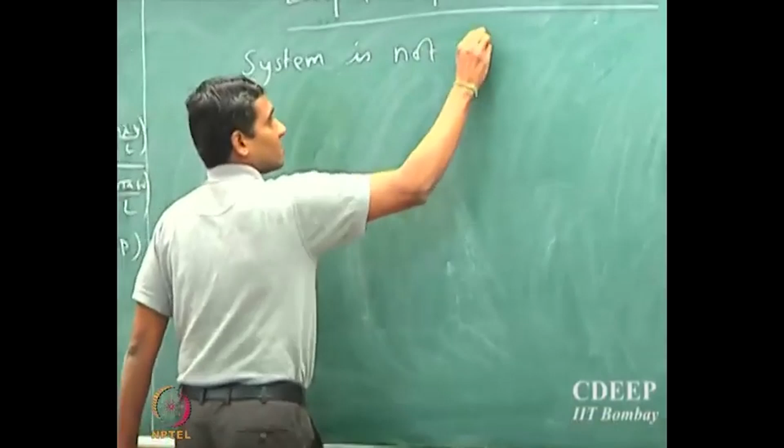This really translates into the question of how to capture the transient. What if the system is not maintained in a steady state? It's possible it's not maintained.

A very easy example is you take a cup of coffee, tea or milk or whatever and just leave it on the table. So there's really no steady state till the system reaches the same temperature as that of the surroundings. So really the steady state of a cup of coffee or chai kept on the table is the state at which every location or every particle in that cup actually reaches the temperature of the surroundings.

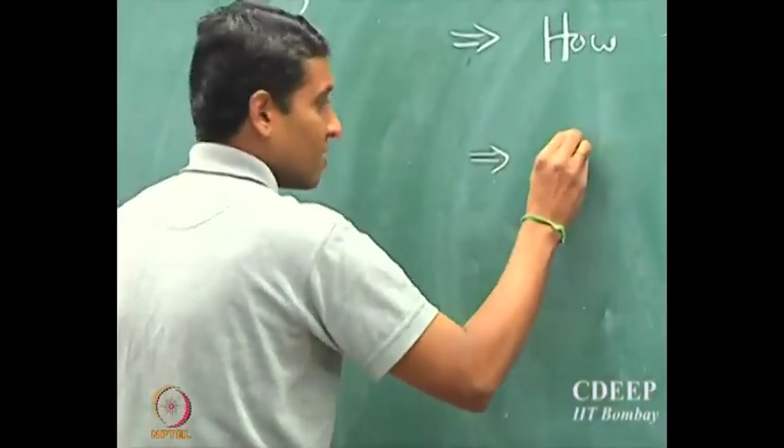Or the steady state really here means steady state is equilibrium with the surroundings.

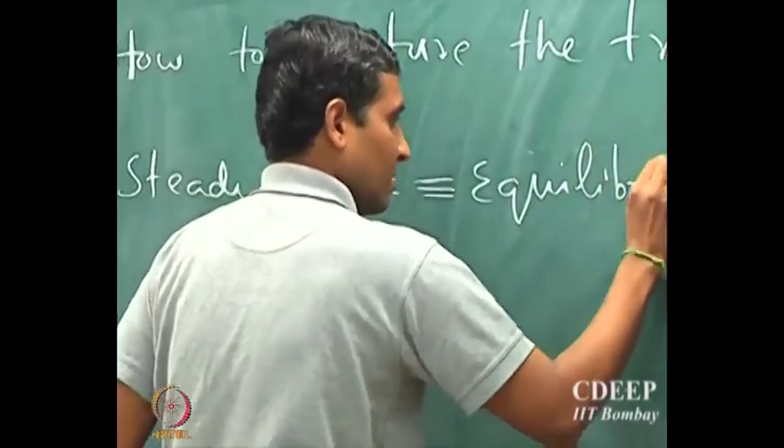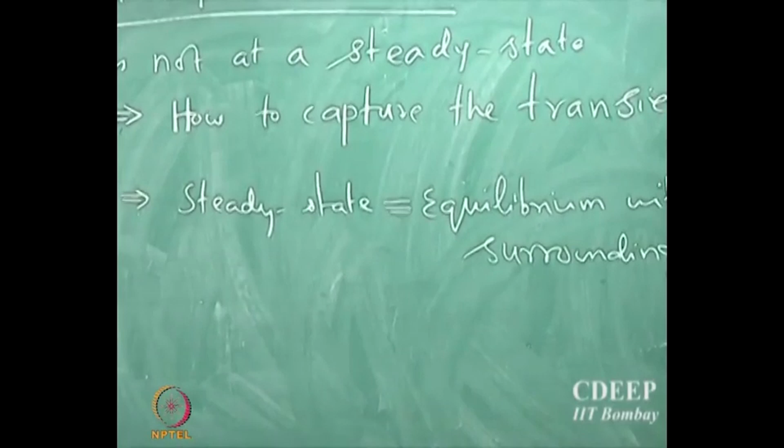So all the cases that we have seen, all the models that we have written so far, except for the general model that we wrote, they are all for systems where it has already reached an equilibrium with the surroundings. So the question is, that's not always true. There are systems where they may not be under equilibrium.

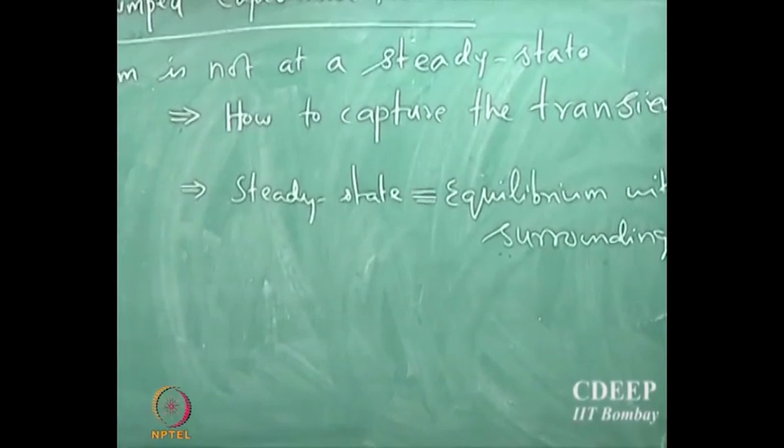So how do we characterize them? How do we quantify them? And what kind of analysis and understanding can we get? That's what we are going to see in most of today's lecture.

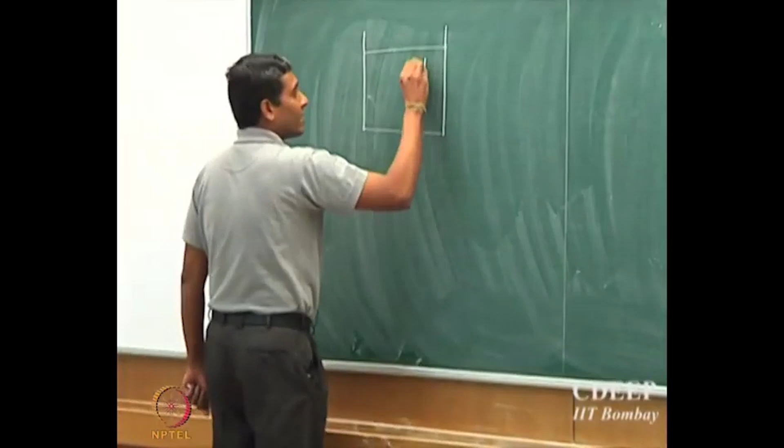So supposing we take a container filled with a certain fluid, and let's say that the temperature of the fluid is T infinity, so it's filled with some temperature. And let's say that there is some solid material whose temperature is Ti. If I assume that t equal to 0, that is time equal to 0, is essentially when this body is actually outside the fluid, and at t equal to 0 I drop it inside.

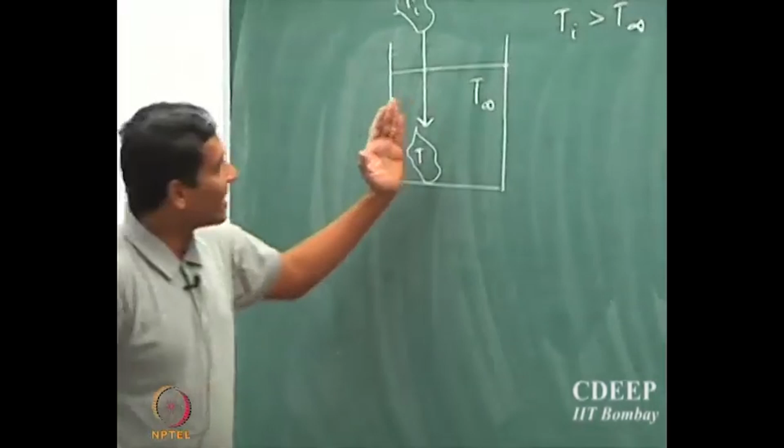So I drop the solid body into the liquid. Supposing Ti is greater than T infinity, as soon as you drop it, there is going to be an exchange of heat. So the solid, because it is at a higher energy state, at a higher temperature, will lose heat to the surrounding fluid, and then it will attempt to equilibrate itself with the surroundings. So that's the normal process.

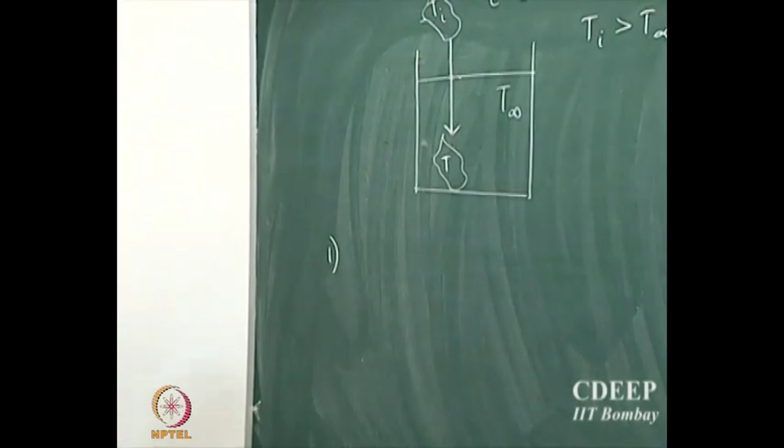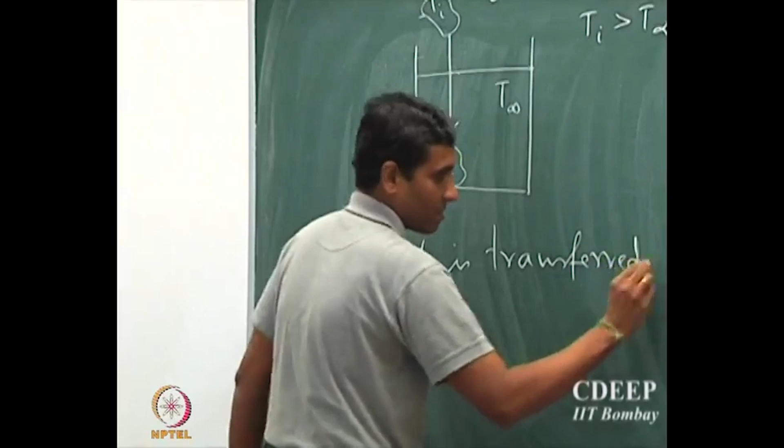So the first observation is that heat is transferred from solid to liquid.

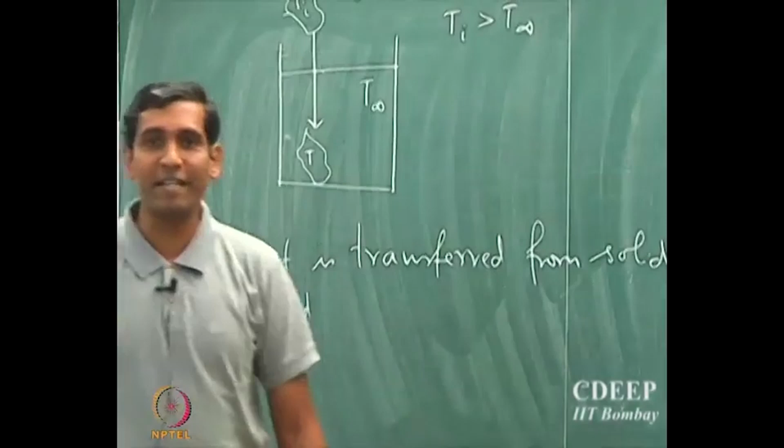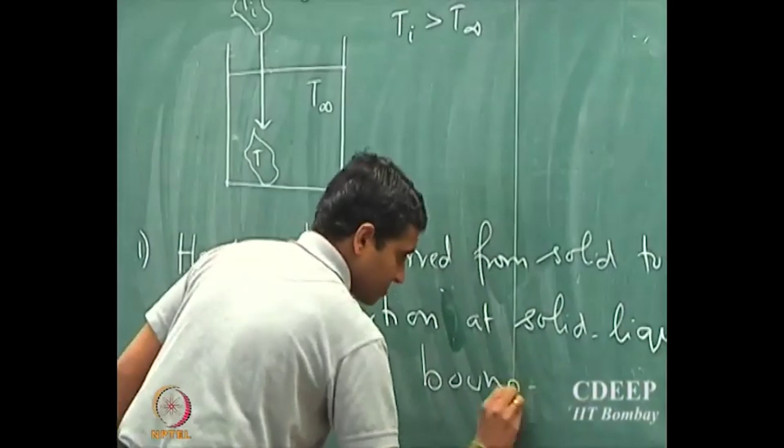What's the mode of heat transfer? Convective, right. So what really occurs is convection at the solid-liquid boundary.

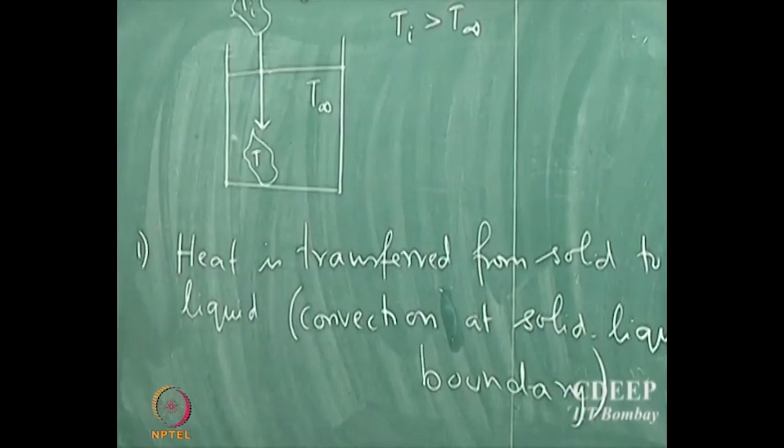What happens inside the solid? So there is conduction.

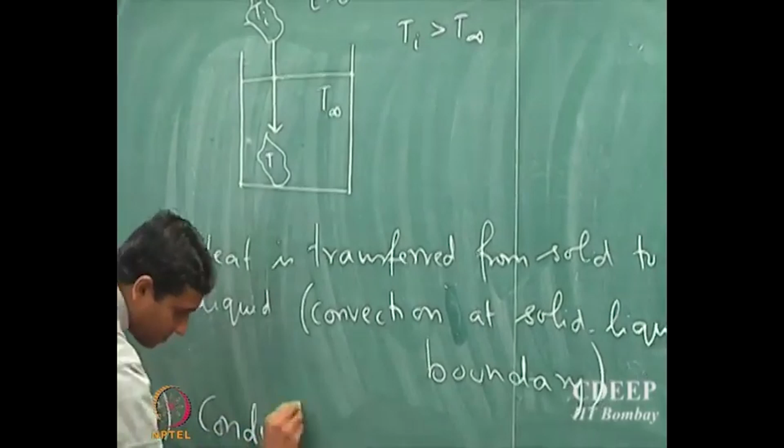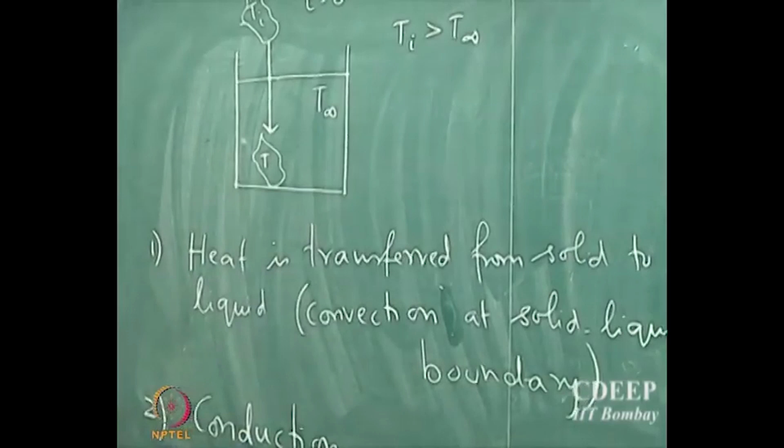So there are two ways to go about it. Supposing we say that conduction is important inside, then we know how to write the model. We've done that. We said accumulation equal to input minus output plus generation, etc. So if I assume that generation Q dot is 0, we know how to write it.

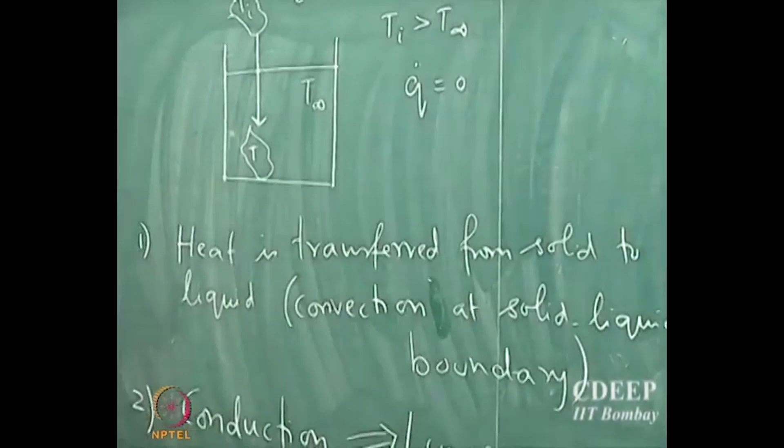Now, supposing if the dimensions of the object are very small, if the dimensions of the object in all three dimensions are significantly small, then one can do what is called the lumping approximation.

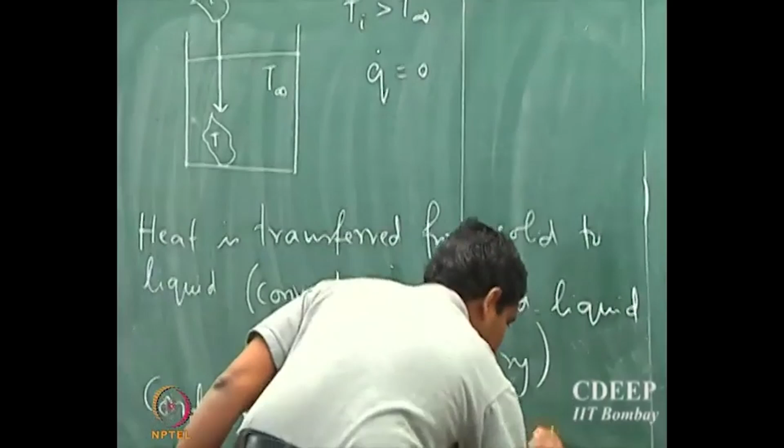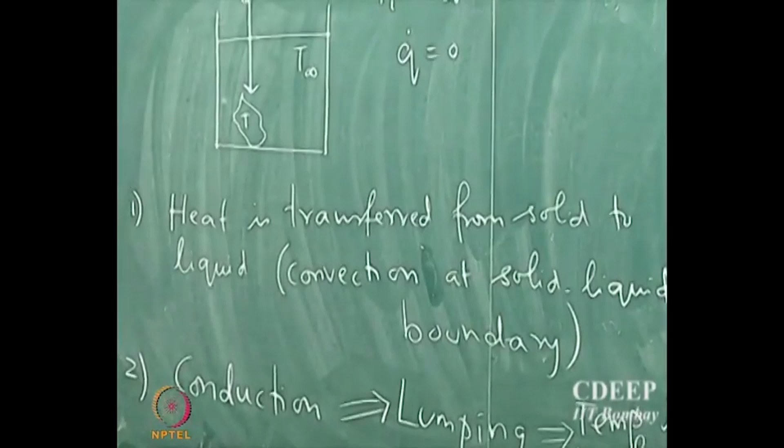What it really means is, as we have seen before, we assume that the temperature is uniform in the solid. So that's what we mean by lumping here.

Now, how do we model this? You want to try? How should we approach it? The objective is we need to quantify this process.

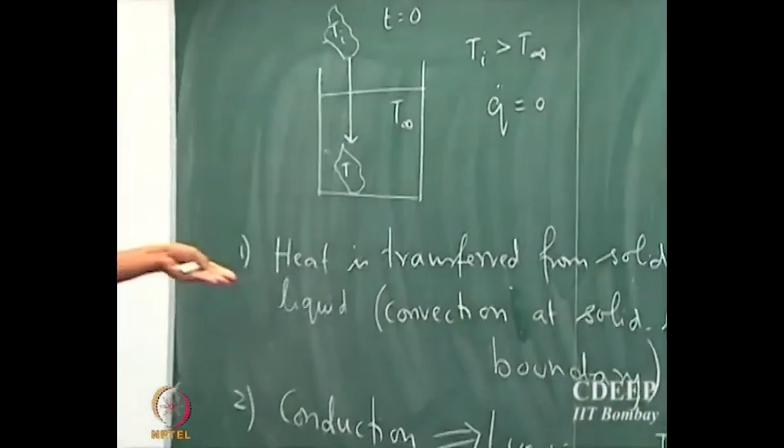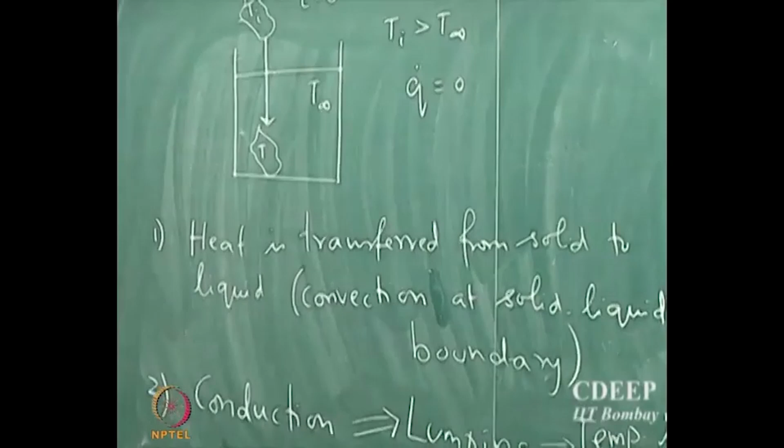Where do we start? So whatever heat that is lost, if you assume that the temperature is uniform, whatever internal energy which is lost to the fluid is equal to the rate at which the temperature is changing somehow, right? So there will be some proportionality constant, etc. So that has to be somehow related to the rate at which the temperature is changing inside the solid, right?

So there are two ways to go about it, two ways to write the model. One is, certainly you could start from the general model and then impose the lumping approximation. It's not very difficult to do, in fact it's very easy. All you have to do is integrate and substitute the corresponding boundary conditions.

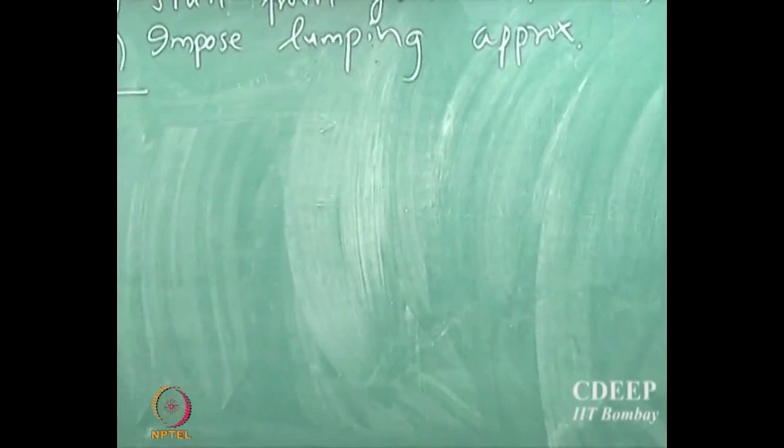Now, a simpler way to do this, of course that involves some math. A simpler way to do this is one can write the model from first principles.

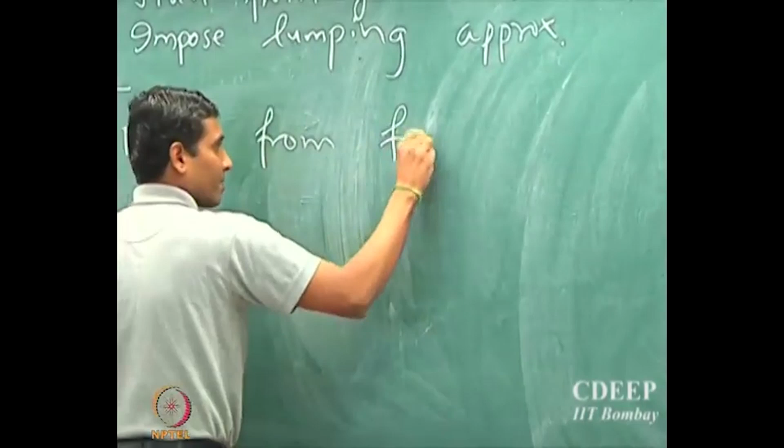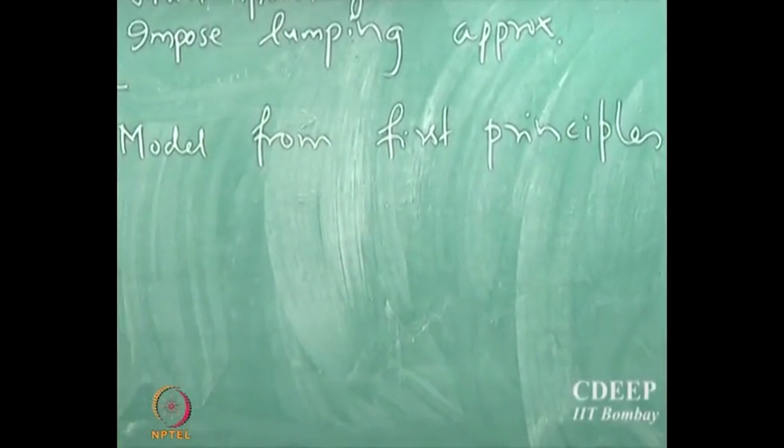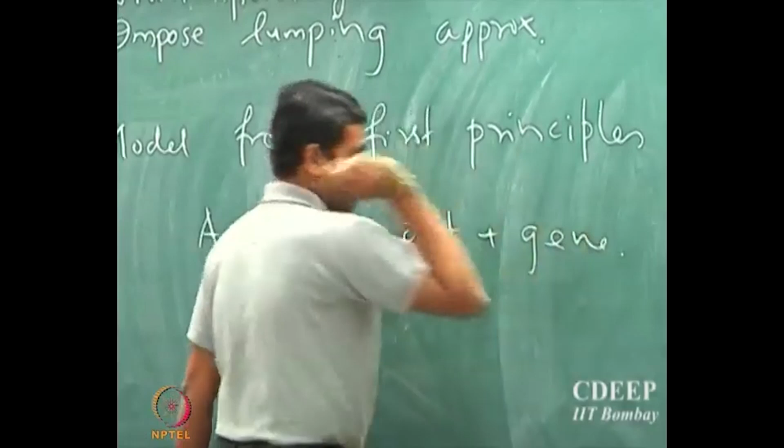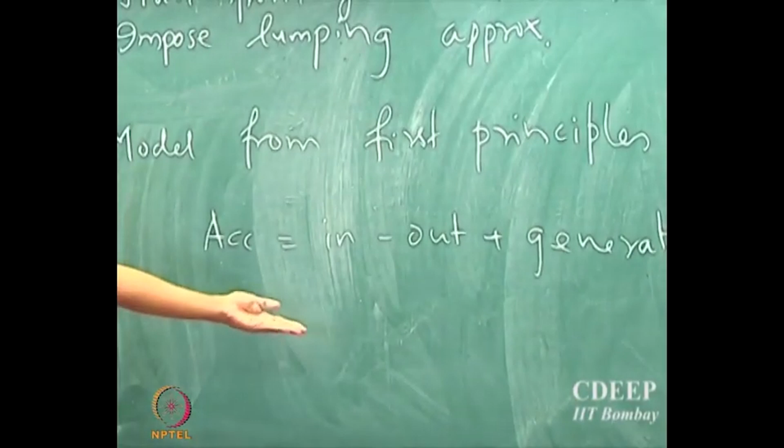A simpler way is to write the model from first principles. We know the common mantra for all these balances: accumulation equals what comes in minus what goes out, plus what is generated. The original general model was also derived using this mantra, but if you use this route, whatever lumping approximation you would do by integrating is already taken into account by writing the model from first principles. You could do either way, it doesn't matter, and you should get exactly the same model.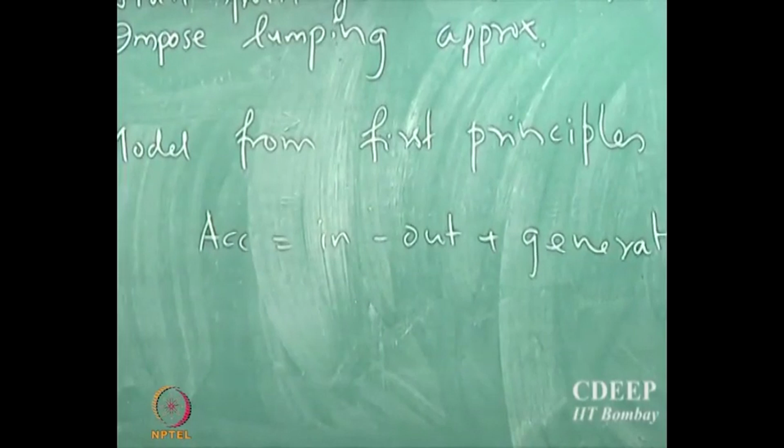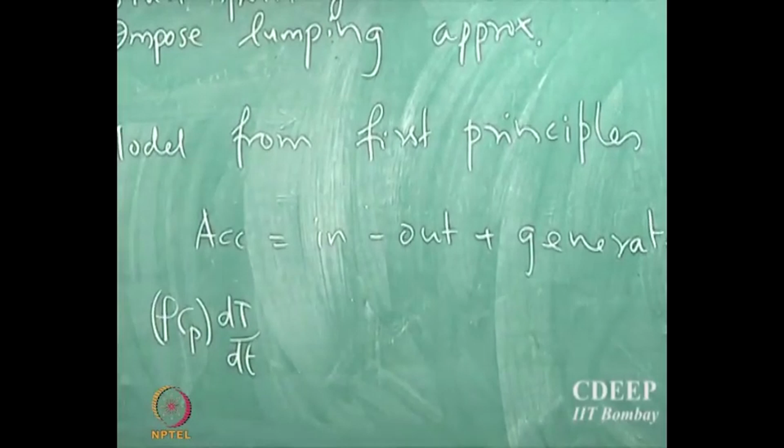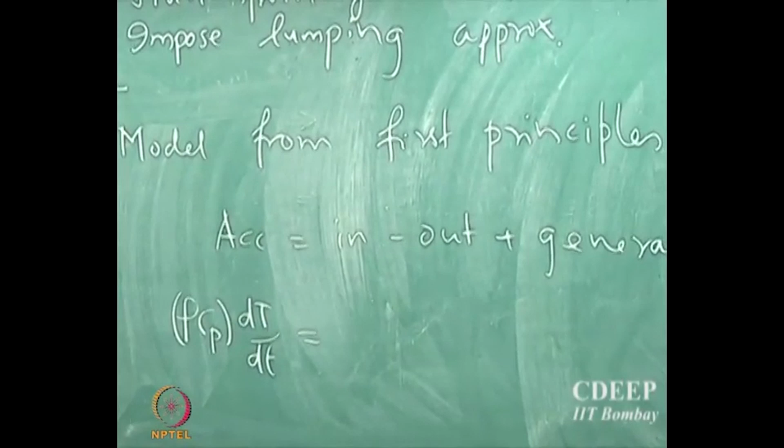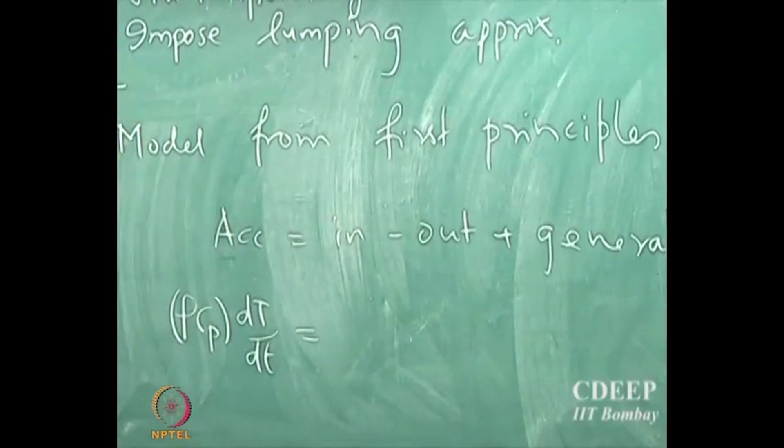So it's easy to write this: rho Cp into dT by dt, that's the accumulation term. What's the input? So the first thing I want you to realize is that when we wrote this first principle route to find a general model, we wrote a differential balance. Now when we introduce the lumping approximation, there is no differential element here. So what do we do?

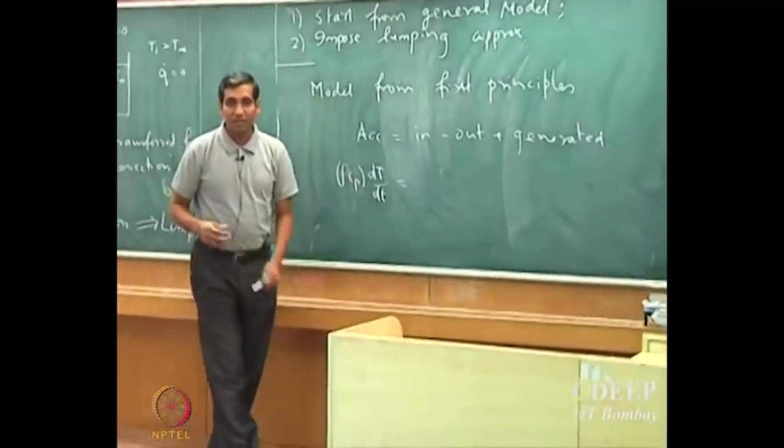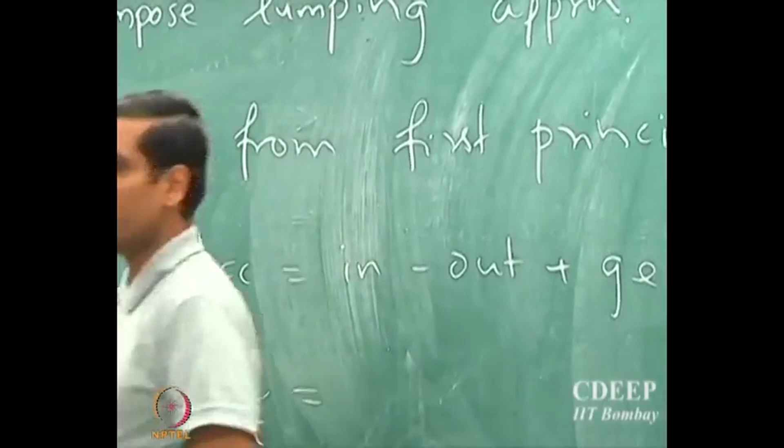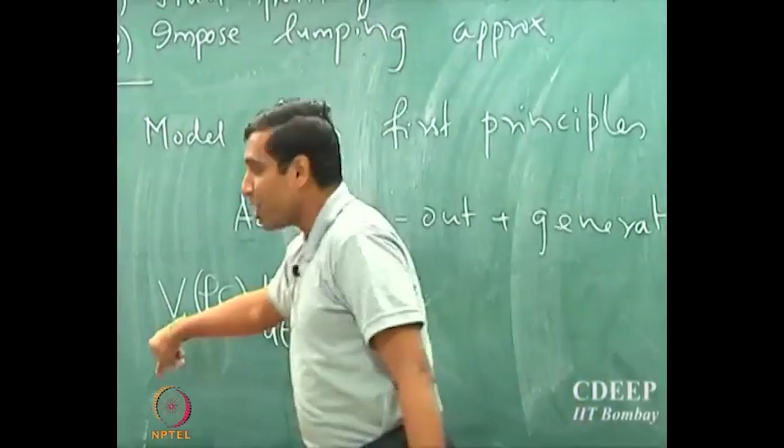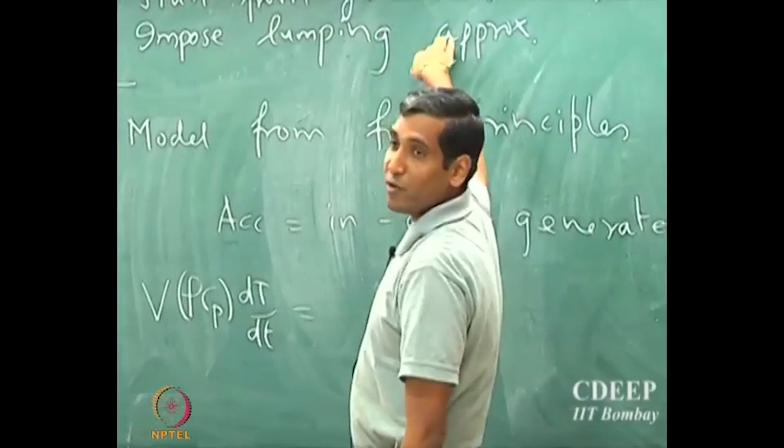We need to multiply this by the area? That's not right. The first term corresponds to accumulation. Remember that rho Cp reflects or quantifies the amount of heat stored inside the system, inside the solid. That's a volumetric process. The capacity of the system or solid to store heat is a volumetric process, not a surface area process. So you have to multiply this by the volume of the system. If you do it from the first principle, the generalized equation, and integrate, the volume scaling will come from the integration. It's a good exercise to try this: start from the generalized model, introduce the lumping by integrating over the whole volume, and you will see the volume term come as a scaling factor in the accumulation term.

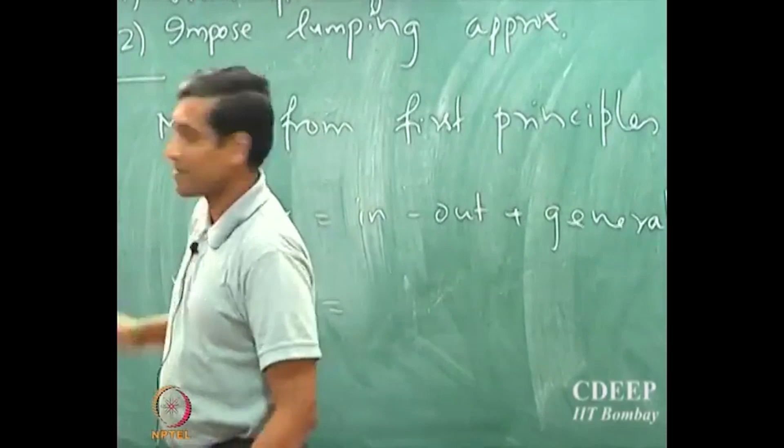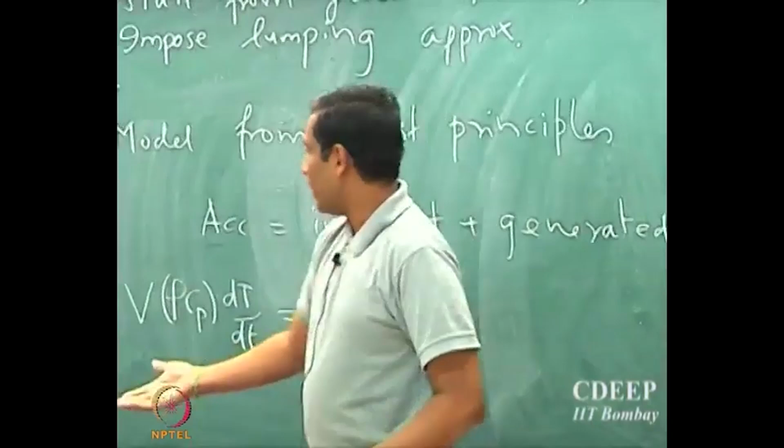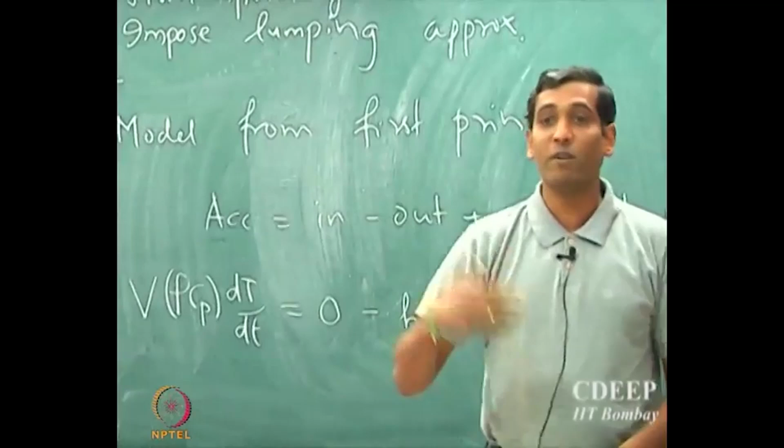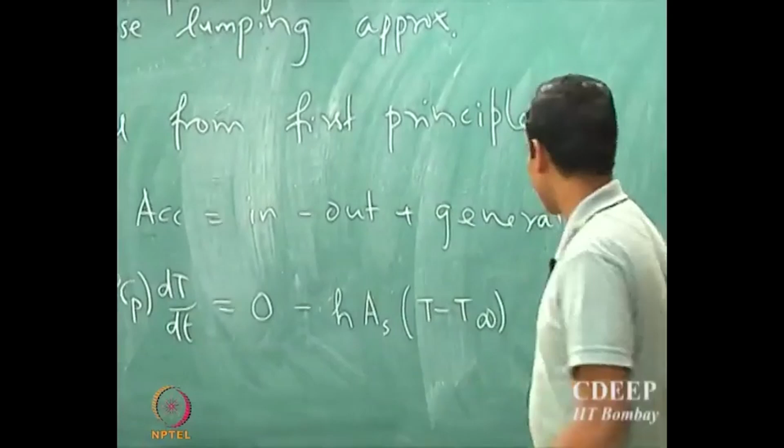So what comes into the solid? Nothing, because it's heated and suddenly dropped inside, so there is no heat coming into the solid, input is 0. What is going out? H into... that's the convective mode of heat transport, which is a surface area process. So it's H into the total area available for heat transfer, multiplied by the temperature difference. That's the amount of heat going out. Plus generation is 0. So the model is very simple.

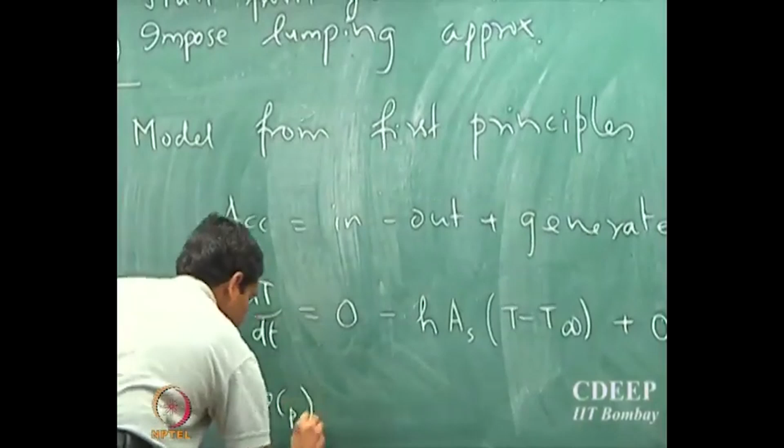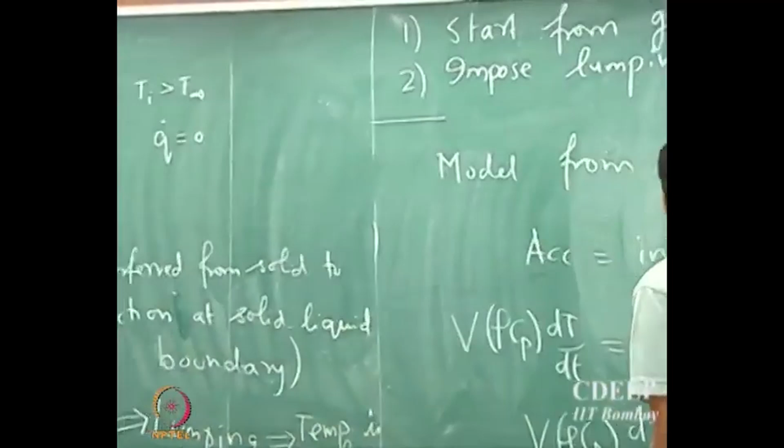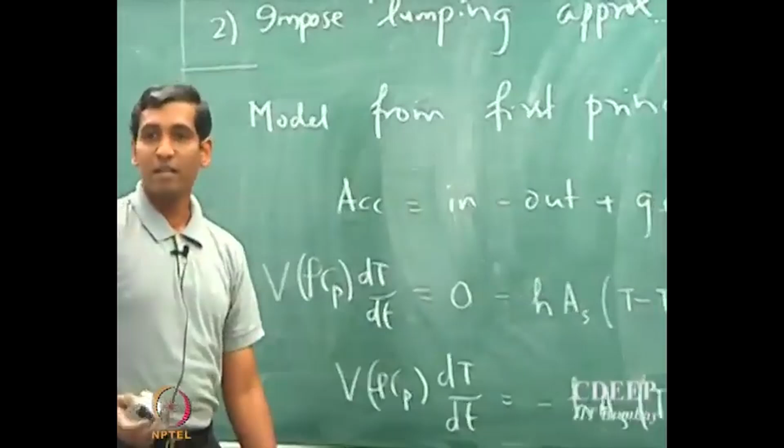So it will be V times rho Cp dT by dt equal to minus H As times T minus T infinity. That's the model. What's the initial condition? T is Ti, that's it. So the initial condition is T at t equal to 0 equal to Ti. That's the initial condition for the model. Is that clear to everyone?

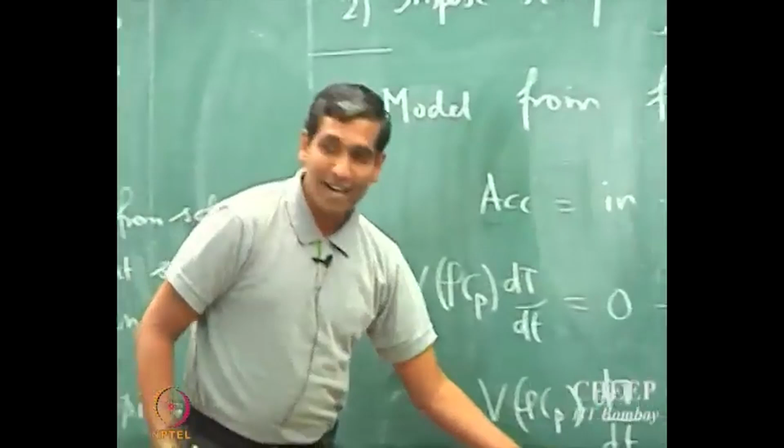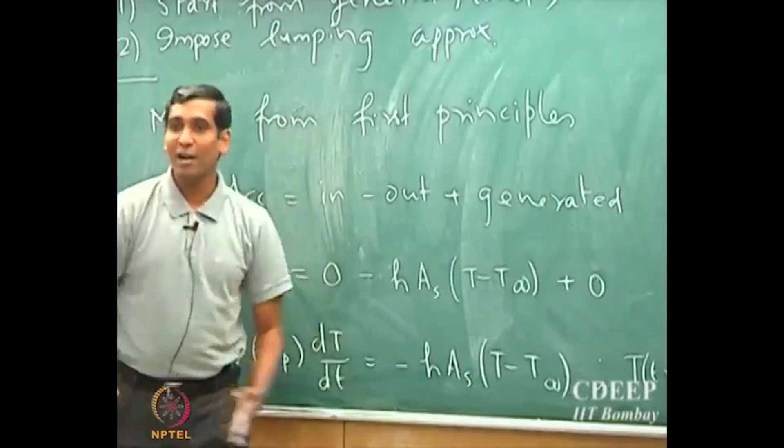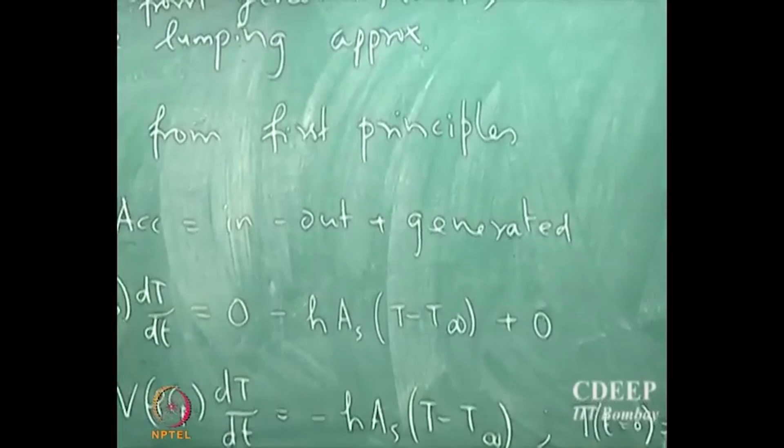So you must appreciate, so far we didn't get into this because it wasn't required, since we were looking at differential balances. You must understand that the capability of a system to store heat is a volumetric process, while its capability to transport heat is a surface area or cross-sectional area process. Whenever there is conduction, it's heat flowing across a cross section, and whenever there is convection from the solid to the surrounding fluid, it's a surface area process. You must understand the correct set of dimensions associated with each term in the model.

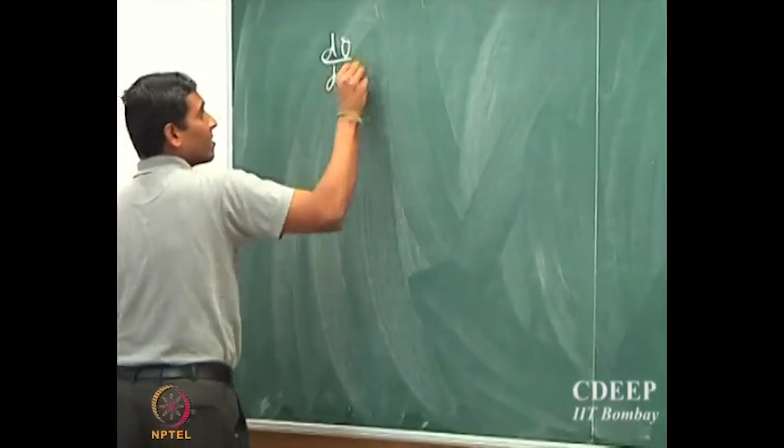So the solution is very trivial. If I assume theta is T minus T infinity, I can rewrite the model as d theta by dt equal to minus h As by rho V Cp into theta. And so the solution is theta by theta-i equal to exponential minus... that's the solution.

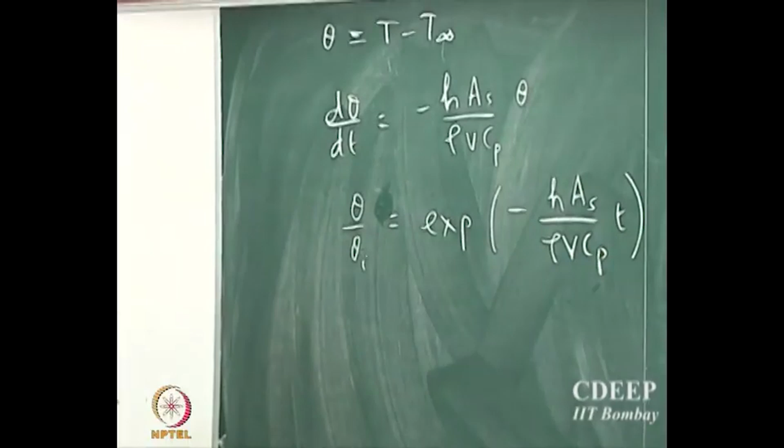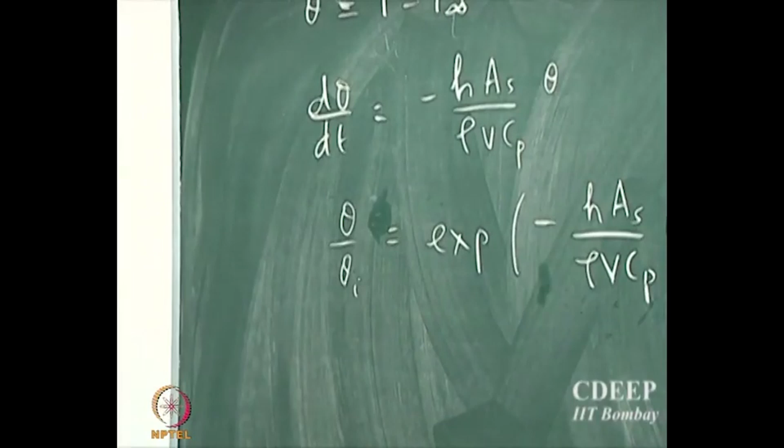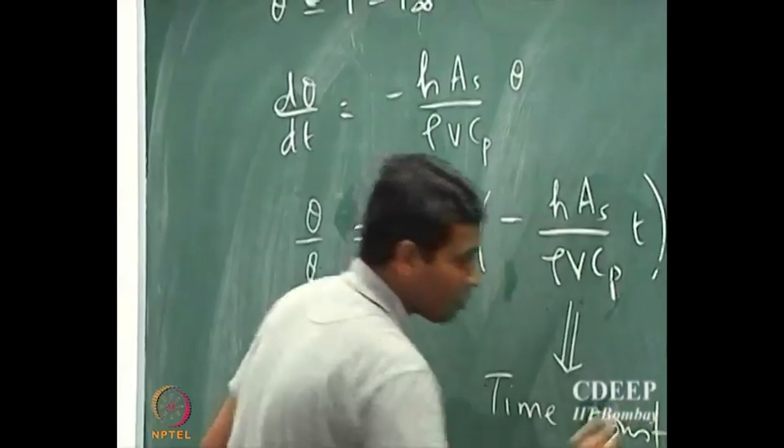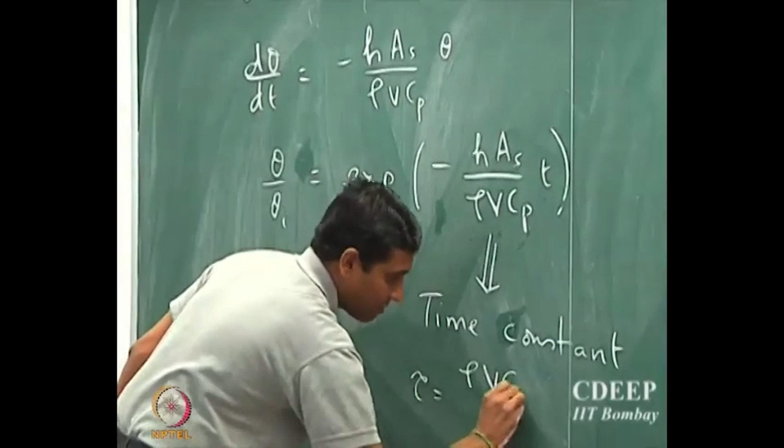What can we say about the coefficient in front of time? What should be the units of this coefficient? It should be 1 by second, right? Because the quantity inside the exponential should be dimensionless. So if time is in seconds, the units of the coefficient should be 1 by second. It really signifies a time constant. Based on the coefficient, one could define a time constant for this process as tau equal to rho V Cp by h into As. If you plug in the units, you will see this exactly has the units of seconds, dimensions of time.

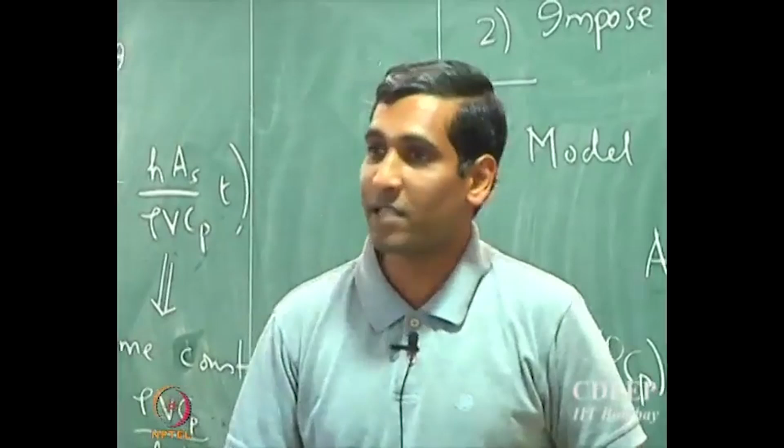So one can define a time constant for the process. What it signifies is the time taken for heat to be lost from the solid to the fluid. Note that you can see two terms here, so there is once again a competing process: one is the ability of the solid to store heat, the other is the ability of the system to lose heat to its surroundings. So one could rewrite the time constant as something like this.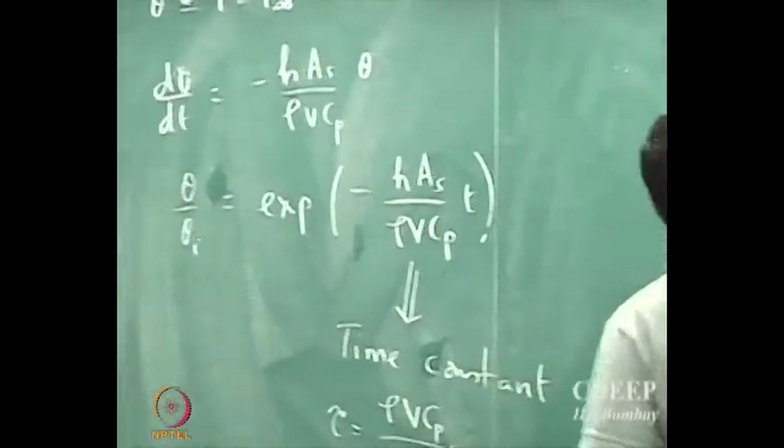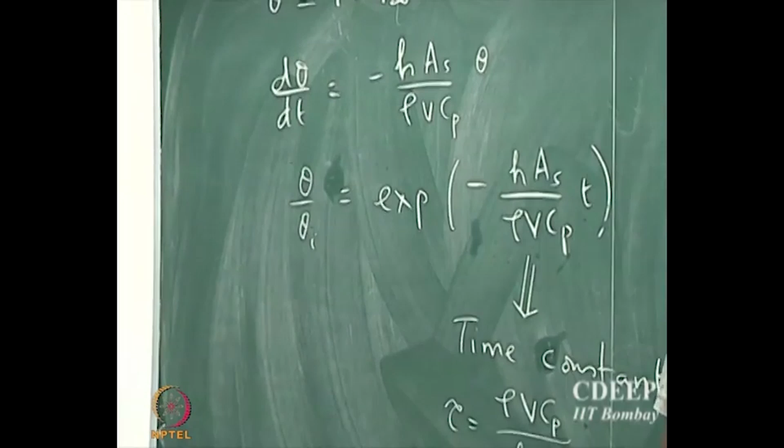So you can write tau as 1 by h into As into rho v into Cp. What is 1 by h into As? It's the resistance for convective mode of heat transport. So you can define this as resistance for convection.

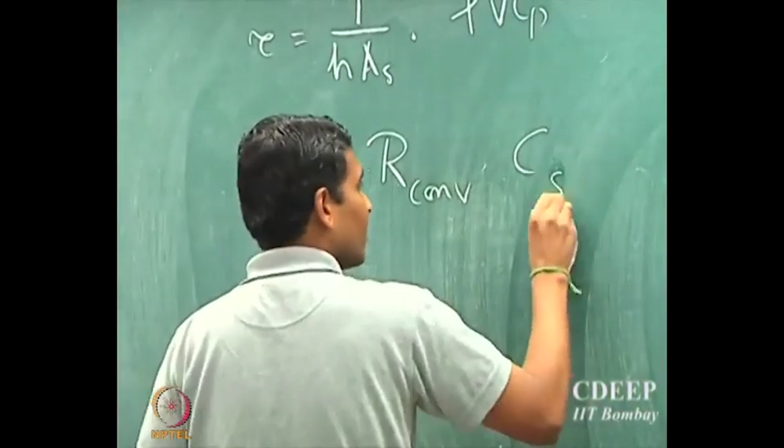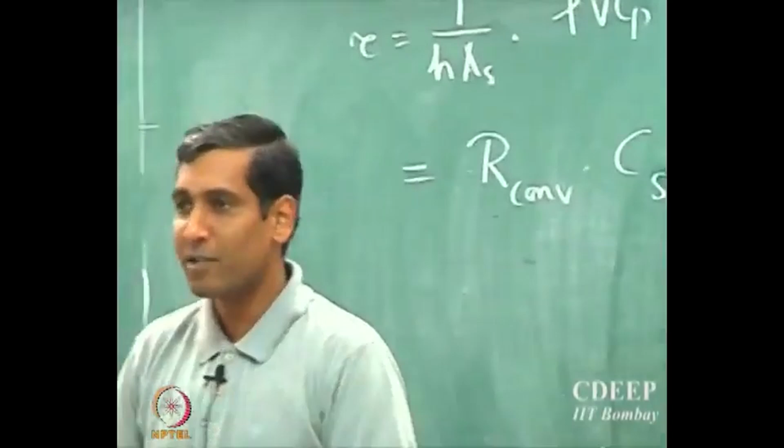What is rho v Cp in terms of electrical engineering terms? What is it? Resistors and capacitors. So it's the C of the solid, the capacitance or capacity of the solid to store heat. So the time constant is simply the convective resistance offered by the system for convection of heat from the solid to the fluid, multiplied by the capacitance, the ability of the solid to store heat in its volume. Is that clear?

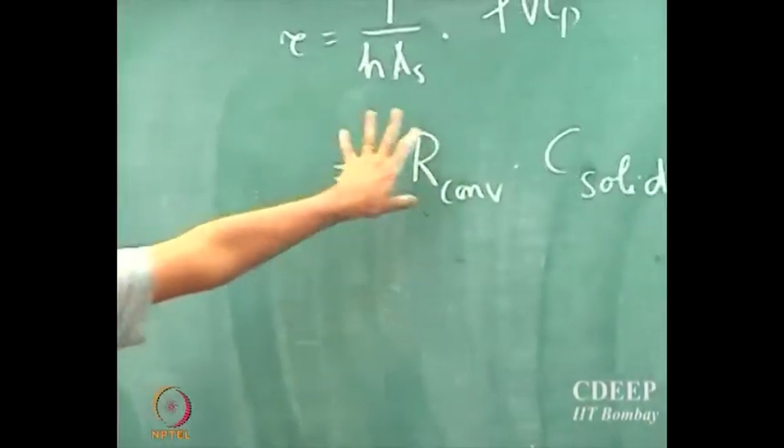So it's very important to understand time constants. In fact, this is probably the first time you are seeing in this course a definition of time constant, and you will see a lot more very soon. Mostly you will see one more in today's lecture, and you will see many more in future lectures. Why are time constants important?

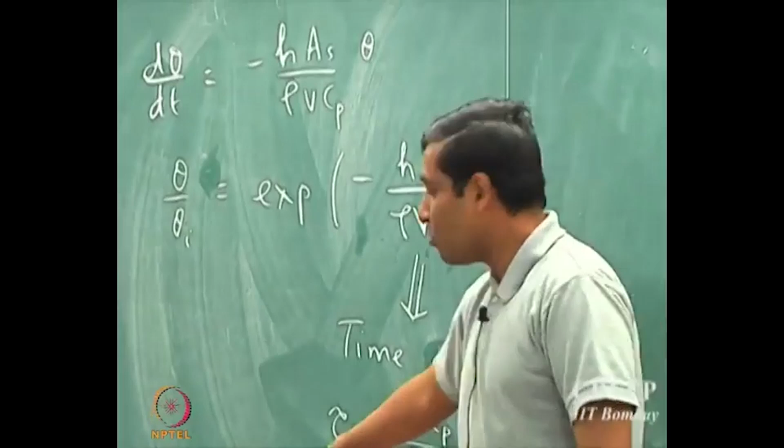Time constants are the ones which tell you what is the time taken for a certain process to occur based on the properties of the system. Note that these are all properties of the system that you are considering. So if I know what the properties are, I don't need to know whether density is increasing or decreasing independent of the others. As long as I know what the time constant is, as long as I am able to relate the temperature change with respect to time constant, I am done.

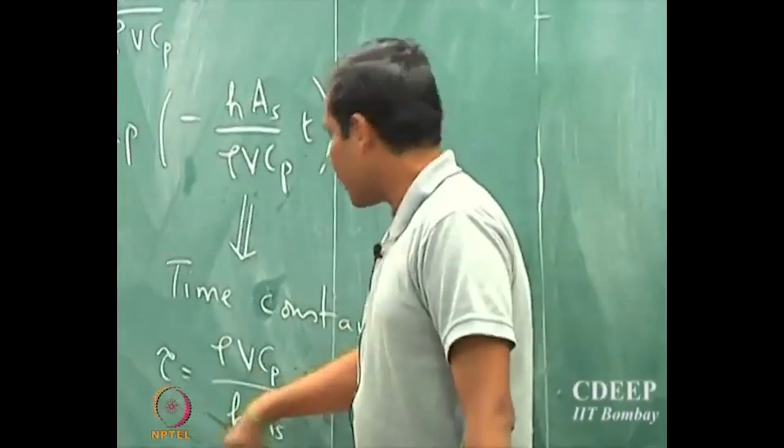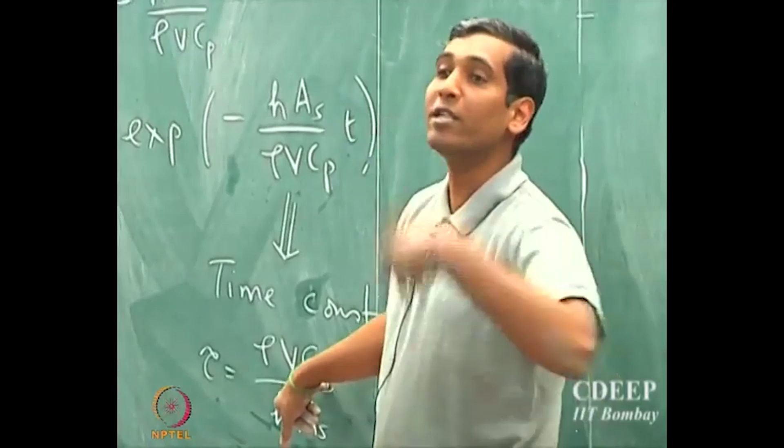I can actually play with many different parameters in order to achieve the same feature that I want. For example, I could increase the capacity of the solid by choosing a different material, and if I know how to change the heat transfer coefficient, which you will see when we discuss convection, I could make sure that these two are simultaneously changed so that the time constant doesn't change. So this provides an elegant method to compare heat transport processes across different materials.

Note that these properties are different for different materials - density, capacity, etc. They are all intrinsic properties of a solid, so they will be different for different materials. Defining such a time constant provides an elegant method to compare the rate of heat transport when you use different materials in the same system. It's very important to understand this, and you will see many more such constants and dimensionless quantities in future lectures.

So I could draw a profile. It's a simple exponential fall. This is time, and this is theta by theta I. At t equal to 0, theta is theta I, so it should start from 1.

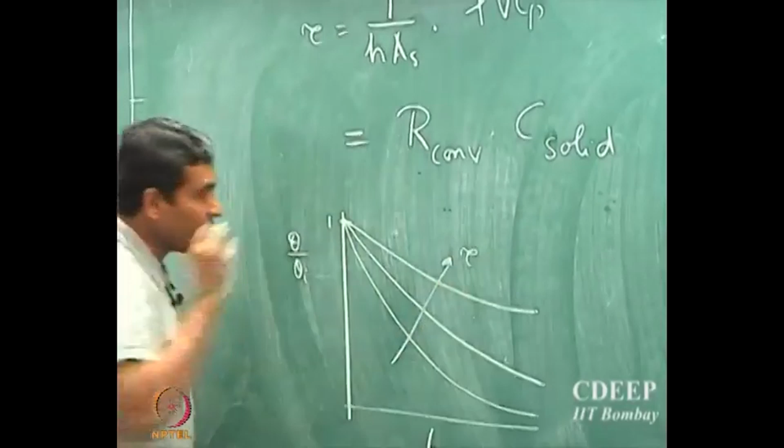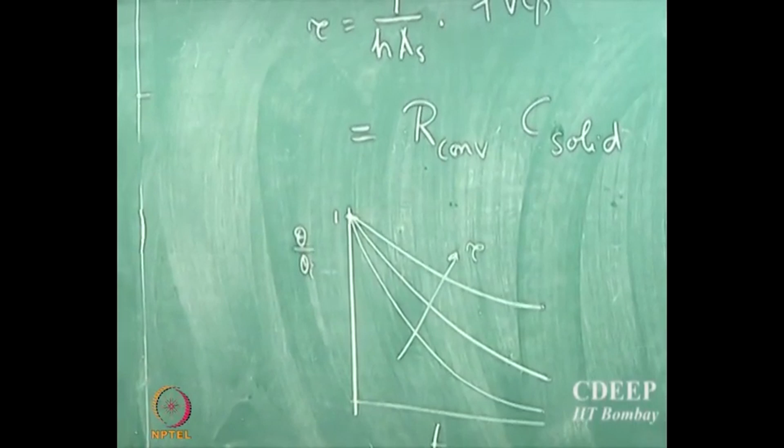As I increase the time constant, note that the time constant quantifies, or gives you an idea as to the rate at which heat is going to be transferred. So as you increase the time constant, the slower the heat transport will be. It will take a much longer time to reach equilibrium.

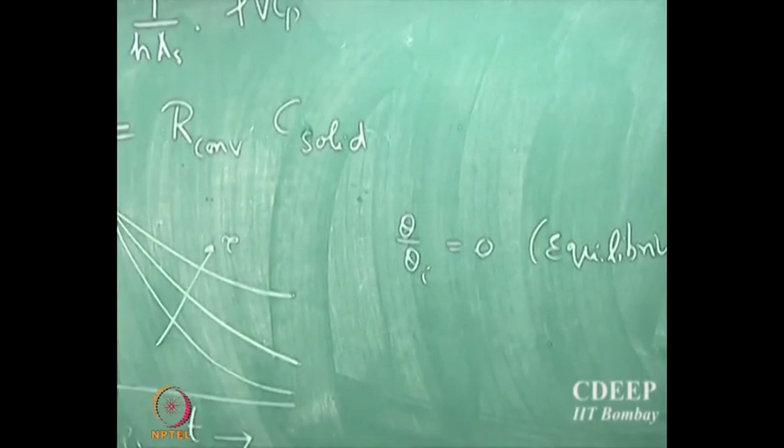What is the equilibrium? T equal to T infinity. So equilibrium is theta by theta I equal to 0. That's the equilibrium. So when the time constant is large for a given system, it takes much longer for it to equilibrate. Depending upon the system and what kind of properties you want, it has to be designed so that you get the correct time constant, so you are able to predict when the system is going to reach equilibrium.

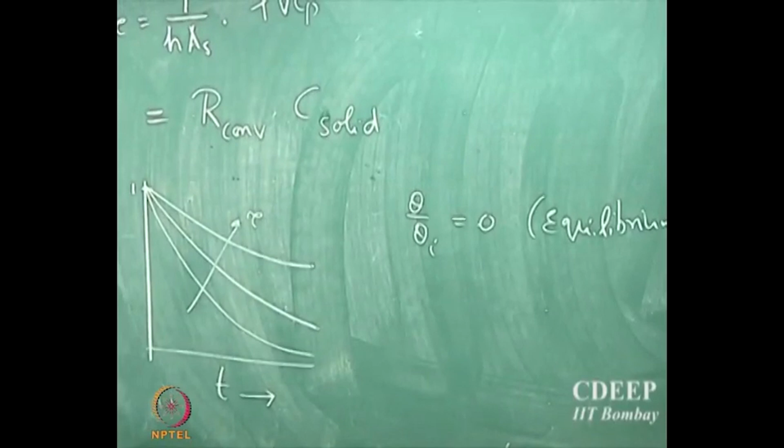This is a very simplistic example. Now this leads to an important question. We said that we made a lumping assumption, or lumped capacitance. So the important question is, when is it valid? What is its validity? Can we quantify the validity of this method?

It's not enough to say that the dimensions are small and therefore I can approximate it to be uniform temperature. If the conductivity of the solid is high, that's not necessarily always enough - it's not just the conductivity, it also depends on the dimensions, right? So it's both the property of conduction and the dimensions of the system you are looking at. So what we are going to see now is how we can incorporate all the properties related to the conduction and convection process and come up with a quantitative quantity which can be used to justify when this method is valid.